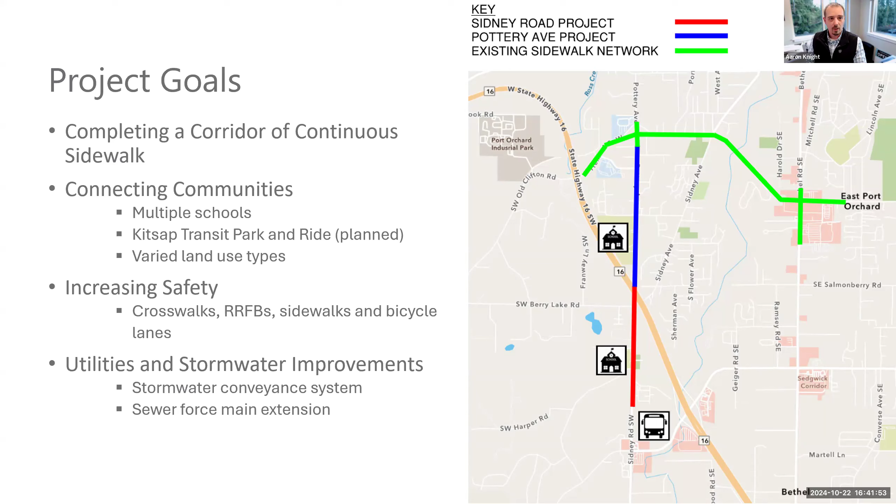So as far as completing the continuous sidewalk, there's some sporadic sidewalk that exists in front of some of the developments that have occurred recently, but we're really looking to fill in a lot of those gaps.

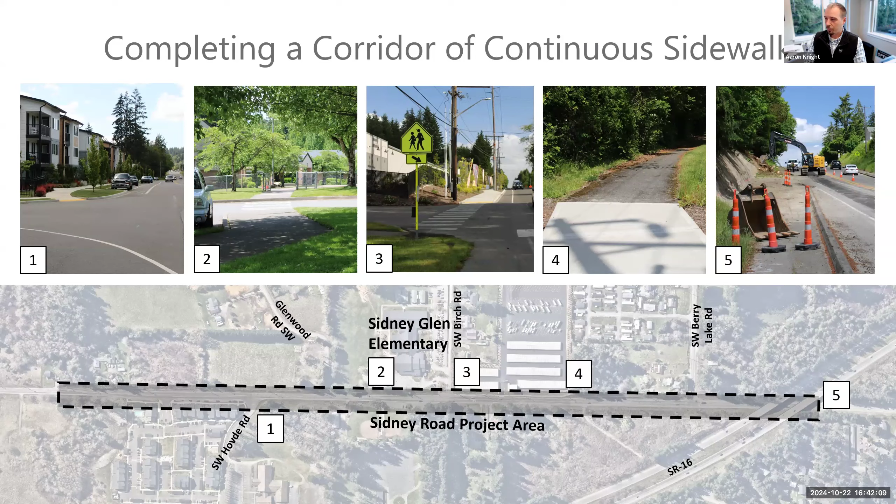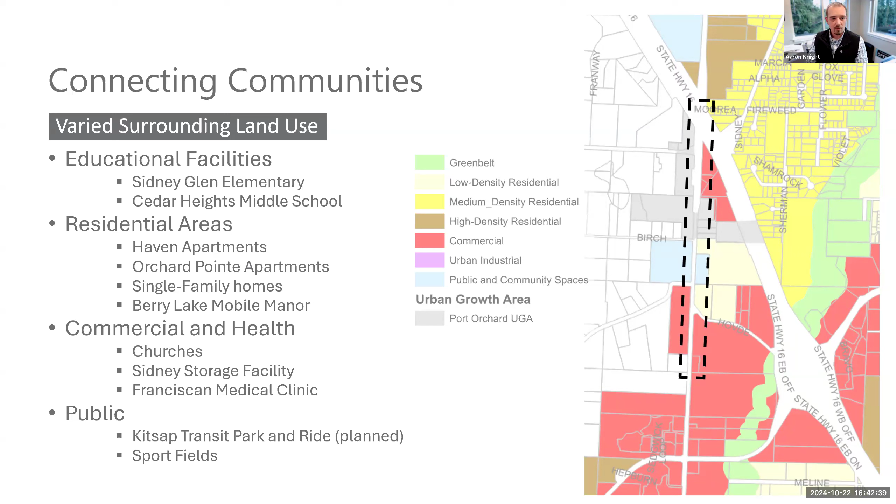Regarding the demand that exists or is anticipated along here, we have two schools, a number of existing and planned residential areas, churches and medical facilities further north, and the baseball field in the middle. So there's really a lot of generators and destinations along this corridor, which demonstrates the need for this sidewalk connection.

Can I interrupt? I'm going to be talking about this tonight in an overview at the end of the council meeting. What is the closest intersection for the beginning of the project? It's Lippert, down to Ruby Creek, where we choke down because we have to build a bridge or a box culvert.

It might be more accurate to say it's from State Route 16 down to south of Hovde, the overpass just north of Berry Lake. Okay, that's what this shows, so I'm going to run with that.

I've got a question on that. Is it going to be like a bike lane too, or just paint, for bicycles there? Yes, there will be a continuous 6-foot bike lane along the corridor along with the sidewalk, and the sidewalk will be limited to one side. The red line here roughly illustrates that it'll be on the west side of Sidney between Highway 16 and Glenwood, then it transitions over to the east side of Sidney down to Hovde.

Now I see it right there, continuous 6 foot. Were you trying to ask if it's going to be a separated bike lane, or is it going to be right on the road? It's on the road, that's correct, it just has paint saying this is a bike lane. That's more economic too to go that route. I think we'd have to acquire land if we wanted to do the other.

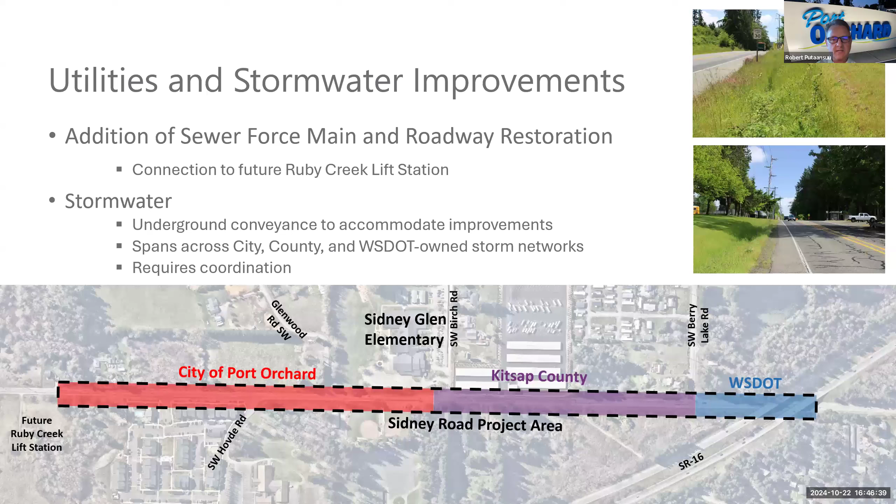I've got a question backing up to the landscaping. Is that grass you referred to going to be on the road side of the sidewalk or the back of the sidewalk on the property side? It will buffer the sidewalk from the road, so it'll be between the sidewalk and the road. I have some maintenance concerns with that, and who's going to mow that grass?

We've been using Mountain Laurel as a lower planting. I guess I personally would like to see some lower, easier to maintain landscape treatments versus grass that we would have to mow. I don't know what others think of that. Dennis, I know that's one of your concerns with your crews. Yeah, a low shrub would be ideal.

And I mean, this is a residential spot, or is it a business? It's in front of a school, in front of the baseball fields. And they're not gonna be obligated to do the maintenance with a capital project like this. Okay, yeah, we definitely would be happy to discuss that with staff and look at making that change.

Council members, you just have any concerns with it? I personally think grass looks pretty aesthetically pleasing, but then it comes with its own set of headaches, irrigation and mowing. So I'm okay with other shrubbery that will be low maintenance, or ground cover.

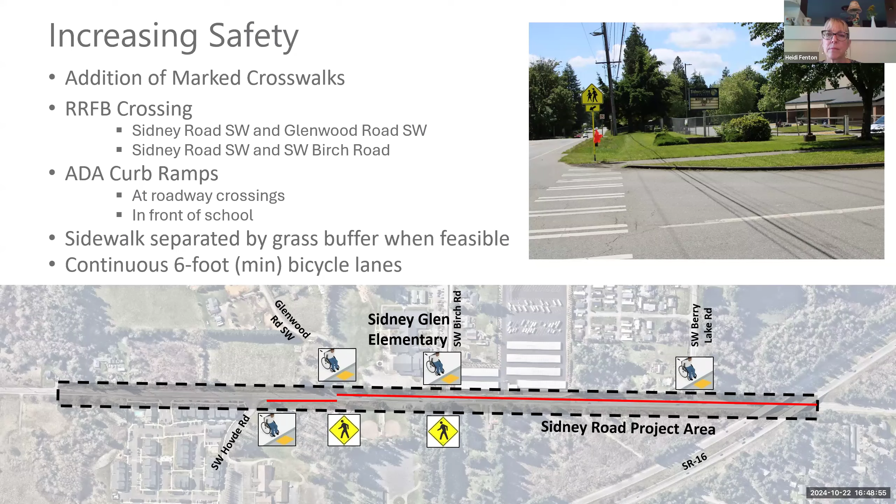So we talked about stormwater utilities. A couple of the other highlights we wanted to mention is, for example, there are some other planned improvements across from the Haven Apartments. There's another planned development across the street that would be triggering a turn pocket in the future, and we've already seen some of that preliminary design. So we took the opportunity with this project to make sure we were placing our curbs and sidewalks in the right spot to allow for those future access improvements and intersection improvements without having to come back and tear up brand new constructed improvements. So we really tried to look forward at what the future of some of these intersections is going to be.

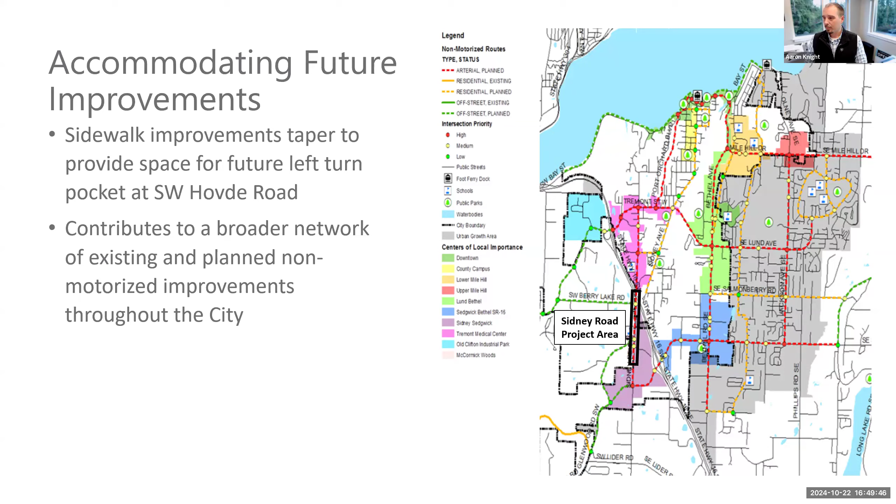Because again, no one likes seeing something brand new getting torn up within a few years. So, and then just touching on the budget real quick.

So the city received a grant. It's a state funding grant through the Safe Routes to Schools program. That program is partially subsidized through the Climate Commitment Act, although it's our understanding that it's not at risk pending any potential rescinding of that act through the election coming up here in a few weeks. So the funding is not at risk so far as we understand.

It's approximately 1.4 million the city received, which when combined with a match is just under 2 million of total funding. That covers the sidewalk improvements and the bike lane improvements. The remainder of the project, which is primarily the overlay and the sewer force main, is going to be funded through city funding.

And then, yeah, as mentioned, we've been just through this note on here as well. Between the city, the county, the state, and the school district, it's really a great opportunity here for a coordination project between all the affected entities. And so certainly we've been prioritizing that.

That was the last slide that I had. Was there any other questions on the project? No, I was just gonna, oh yeah.

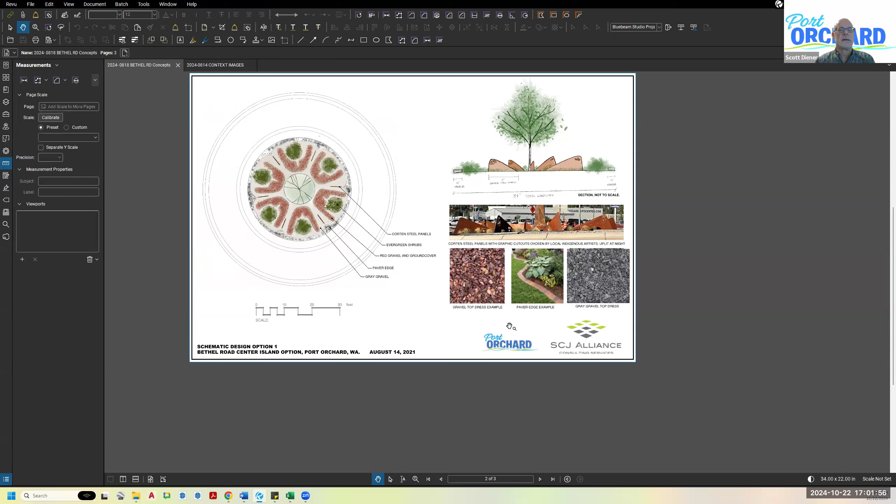I think Heidi's asking, will it be retained - will there be a slight curb or something that keeps it from spilling out? Yes, we would want it retained. We'd probably use some sort of metal edging to keep it separated if we had different colors next to each other. It would also be crushed rock, which tends to bind together, so it wouldn't be loose. If somebody went in there and started digging it, it wouldn't be permanent, but it's used regularly in roundabouts and wouldn't migrate. Typically we keep it below the curb anyway, so even with heavy rain it wouldn't wash away.

And the city maintains that, because once you get weeds and stuff going in there - we have weeds popping out on all kinds of roundabouts, maybe not right here in the city, but... we're going to have two more concepts to share.

Yeah, you would have to do some maintenance. I mean, it wouldn't be too bad - I suppose you could do different paving styles, like stamped concrete or something in there, in lieu of gravel.

And then you would have very little weeds growing through there, but weeds will grow anywhere, so there's always going to be a maintenance issue with anything.

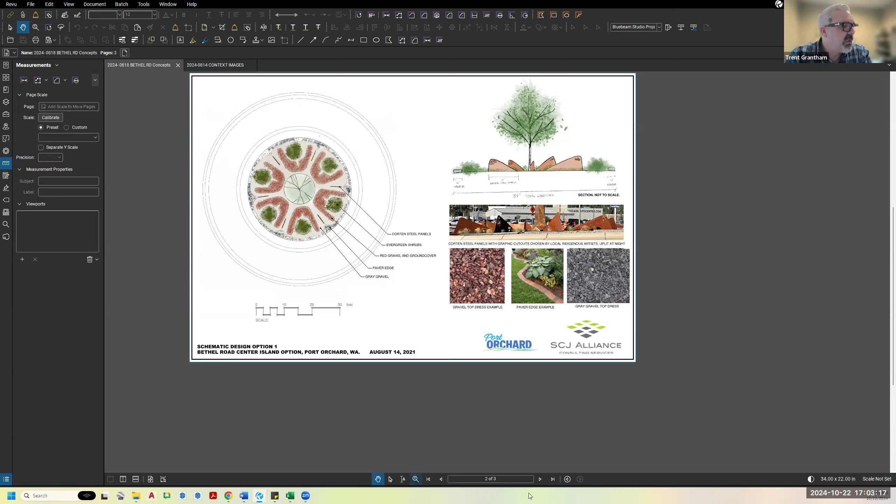Really, our second concept, these designs, the emphasis of all these was, Scott, you were kind of the driver of wanting something unique on this corridor. So that's why we're trying to elevate our game here.

Yeah, I appreciate that. I think the first presentation would look good but wouldn't look terribly inspiring, and would look like a lot of roundabouts. I want something that when people come into Port Orchard, they say 'I've never seen that before.' That is really cool, because these are, they're not showcases, but they're focal points.

So this is a second option. This would be more intensively planted. Instead of having a central tree, we would have three trees kind of in a grove.

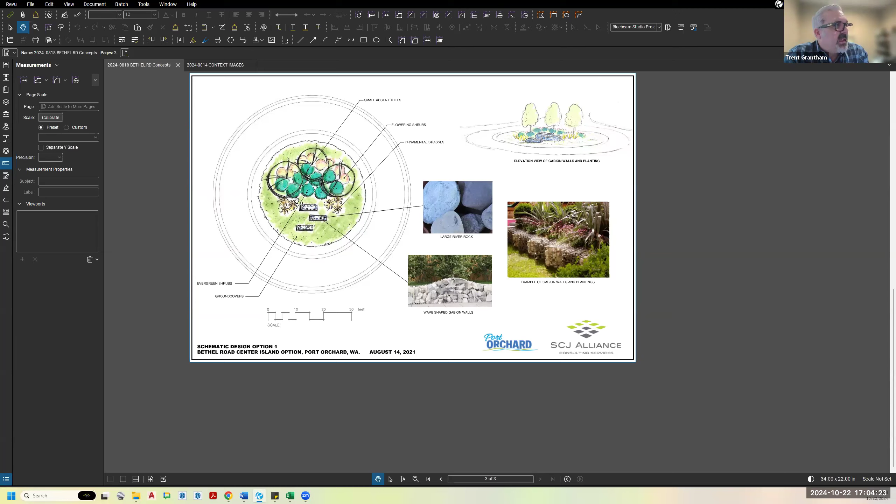We would have these gabion walls filled with stone in kind of a wave pattern, so as you're driving up, you see these different waves, giving it some undulation, some movement, along with more heavily landscaped ground cover, some larger and medium shrubs, and the backside would probably have some medium shrubs as well.

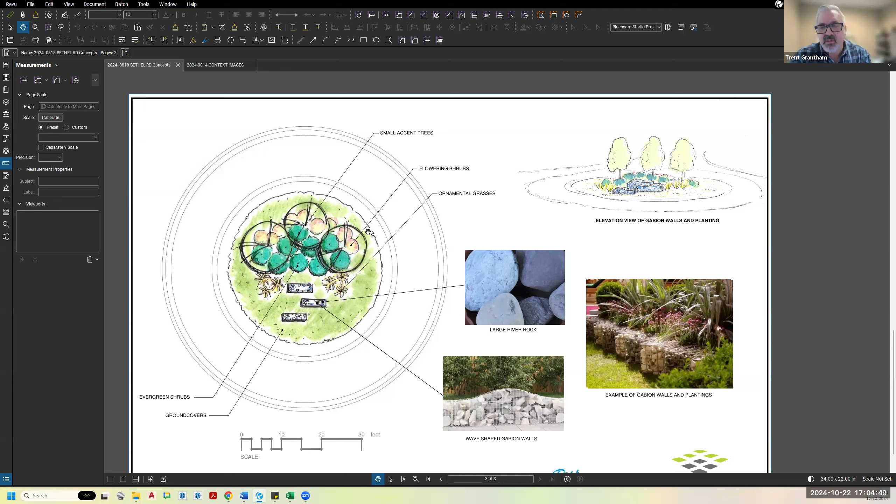Again, these gabion walls could be lit up at night. You could light up the trees with underlighting as well, and it could be a pretty dramatic effect.

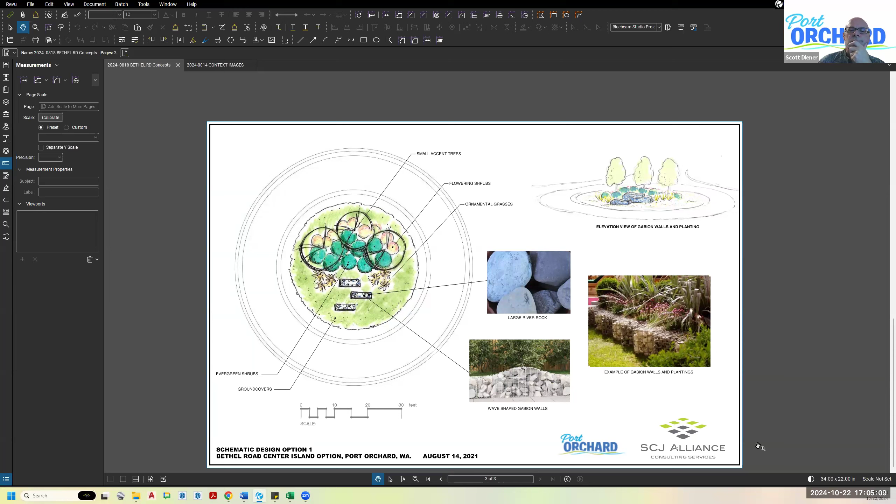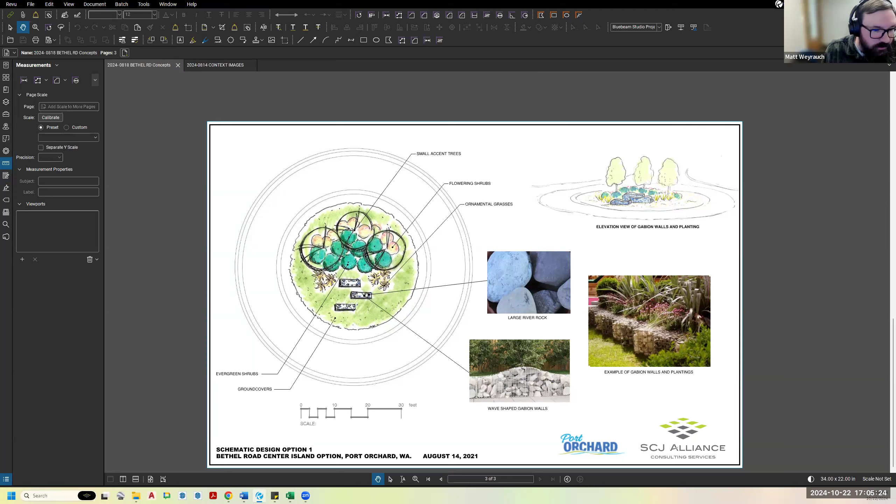I'll just say that I've seen those gabion walls and they tend to withstand the test of time. They are pretty. For some reason, I don't have the third one. It's the first sheet, Trent. Oh, is it? Oh, there it is. Okay.

Okay, so our last concept was incorporating more of different levels, and by doing that, we would have these curved, undulating walls made out of concrete.

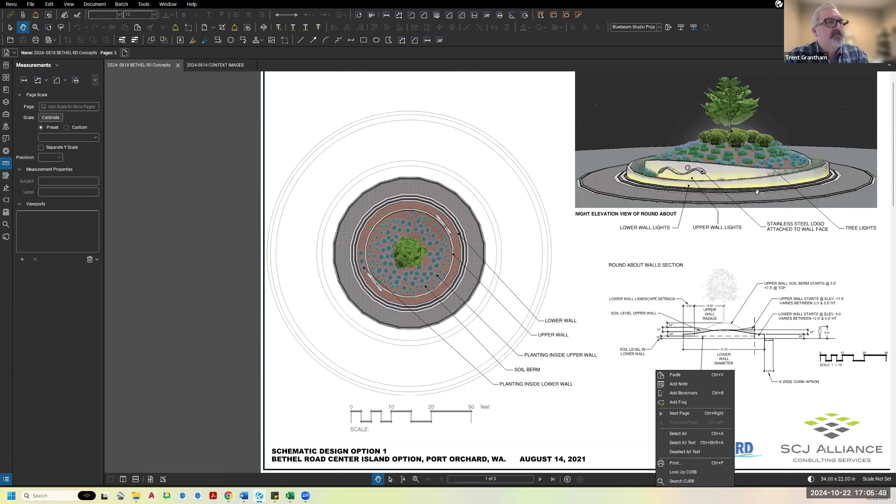Again, we would have them highlighted with lighting, and then in the center it would be more intensive planting, so it would look like this from the side, with these undulating walls. Then we would have a large planting area on top with a single tree that could be uplit as well, some medium shrubs, and some lower shrubs below that.

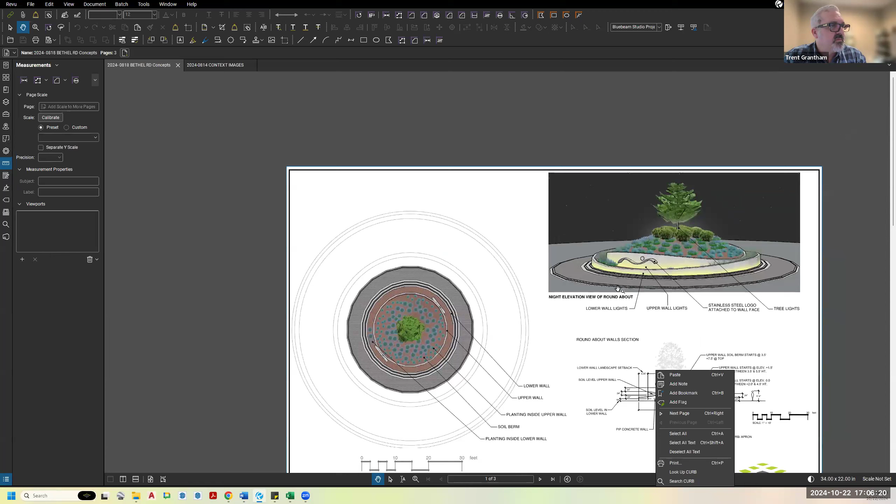And we had incorporated the concept of this from your ferry dock into it - we could do it in stainless steel, recessed, or something else, but maybe we would also have something imprinted in the concrete wall itself.

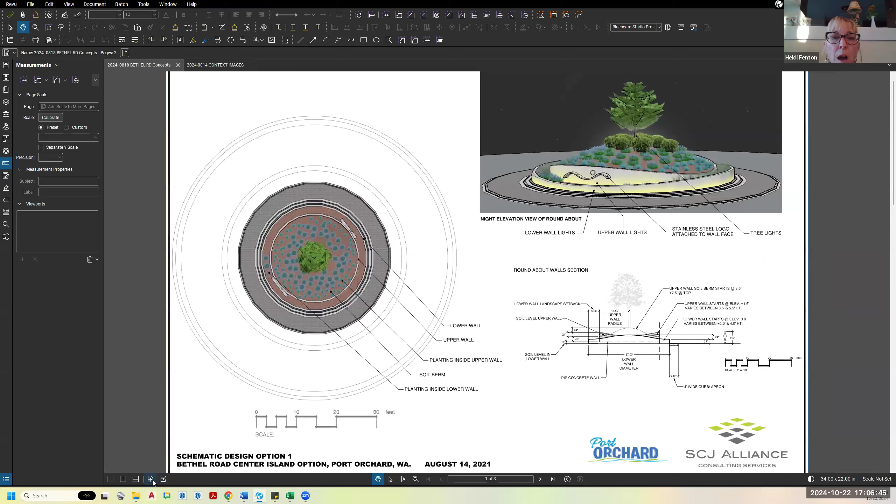Actually, out of the three, I think this one is the most unique because of the levels. And maybe imprint something that's really a part of our downtown instead of that little wave and a little round circle. Maybe put a ferry there or something more nautical.

And I like the way lights can be lit up. I think that's a really nice feature, and it can change with the season too, but having lights on the tree, I like that.

So can we take a look at the second one again? Yeah.

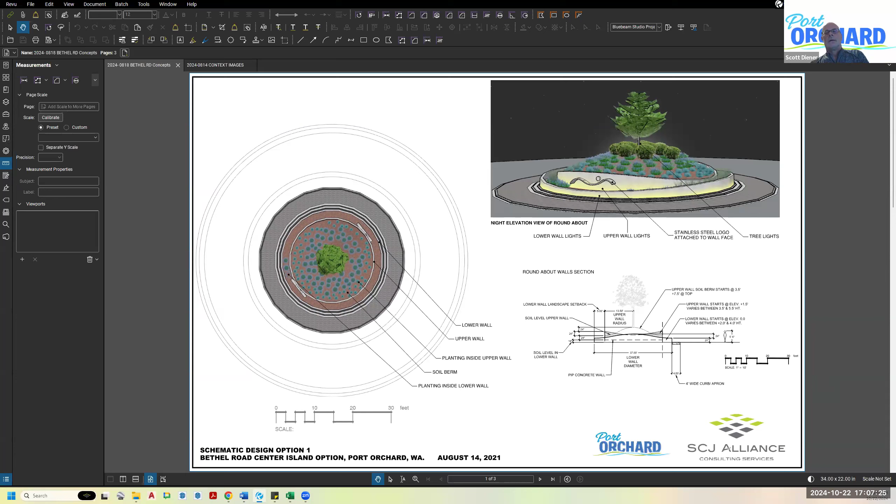The other thing to think about is you could incorporate elements from any of these into any one of the designs. You probably have to pick some kind of structure you want, but as far as the landscaping and everything, it can change. They're just kind of ideas.

And how much time do we have? We don't have to vote on something tonight, right? It'd be ideal if you guys could come to somewhat of a consensus and a recommendation. We need to take this to the full council, but in your committee work, if there's consensus that the committee recommends something, we share all of the concepts with the full council.

I've got my point of view on this roundabout art. I don't know if anybody's driven through Wenatchee on the way to Chelan - they've got a really cool tall, maybe 15 feet or more, tree made out of metal art. It's really cool, it's 3-dimensional, not flat, but a very cool looking piece of metal art that resembles a tree.

If you've been to Bend, Oregon, headed to Mount Bachelor, you'll see a roundabout with a giant metal O. You'd think it's a flat O, but as you drive around the roundabout, you realize it's not, and that O transitions into an infinity symbol. It's moving as you drive around it. Its shape isn't literally changing, but as you see it, it's changing as you drive around the roundabout. That's pretty cool.

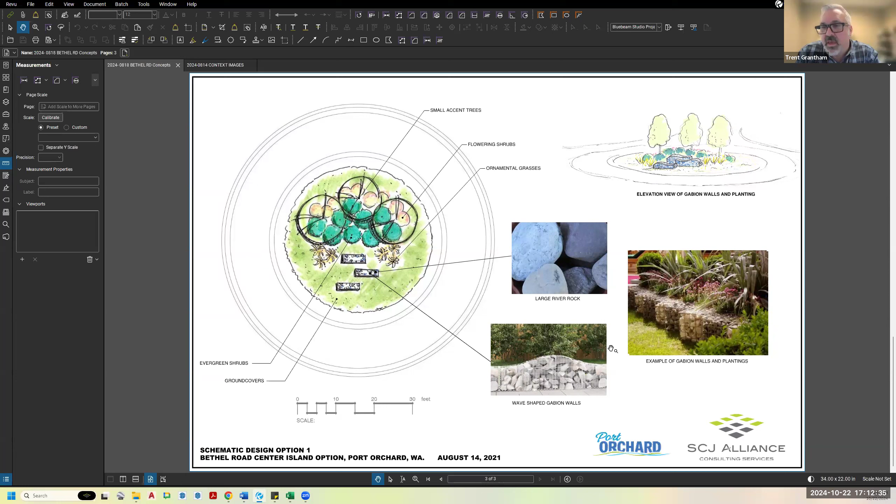Yeah, I mean you could probably even incorporate some artificial turf in some of the areas too. I just saw that in California at a conference I was at, and I was blown away how good it looked. Once you stood on top of it, you knew it was turf, but from 10, 15 feet away, it was beautiful. And this is elevated, so I don't think there's any risk of anybody driving on this.

That could be a good alternative. Yeah, turf, sure. What's the lifespan of turf typically? Does anybody know? I know if you're playing on it, it's about 10 years before you start programming replacement. Our landscape architect probably is going to give you better numbers than that.

Alright, I'm happy with that as an option. That would take care of maintenance obligations, for the most part.

And you two like that one? I like the third one, and you don't have to put as much vegetation in it. I've never seen a roundabout that is in different levels. Would the best of all worlds then be to maybe not have sporadic gabions, but have them kind of ring around like the other one had around the perimeter? I don't know about that. Okay.

I don't think they're accent pieces like here, in some fashion. And maybe we've got more roundabout designs coming up. I'd like to see - I also did like the third option with the variable walls around it. Maybe we could look at incorporating those variable walls with some metal art, which is what I'd love to put to the council. So sort of a hybrid in the future.

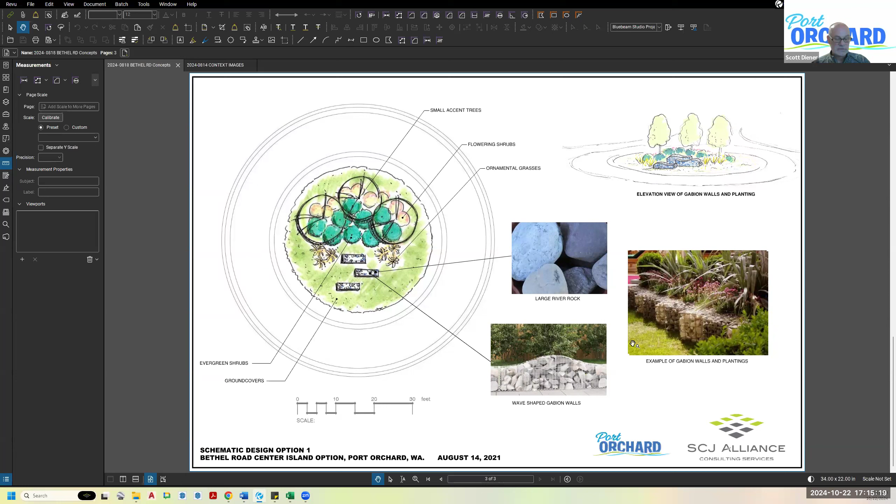I think now we're back to updates. Is there anything more on Bethel Phase 1? I think that was it, right? I think that's all, yeah. Just trying to get some insights on where we're going to go with the look and feel project. Okay, so just some updates. We've been working

feverishly on the State Route 166 Bay Street reconstruction project, and just want to update you on our progress. The 30% design was completed a few weeks ago, so the city's been working on getting that all reviewed. We've been spending quite a bit of time coordinating with Puget Sound Energy on how we're going to approach the undergrounding for the street. The next step for you will be next time around, we'll be having that consultant team, the KPFF team, come in and provide a presentation about how that alignment's shaping up.

Tremont 2 and 3, that's a new project for us. Christian's the project manager for the city. We were able to get the funding approval from WashDOT and provide notice to proceed. You have previously approved the professional service agreement, so that one's getting started.